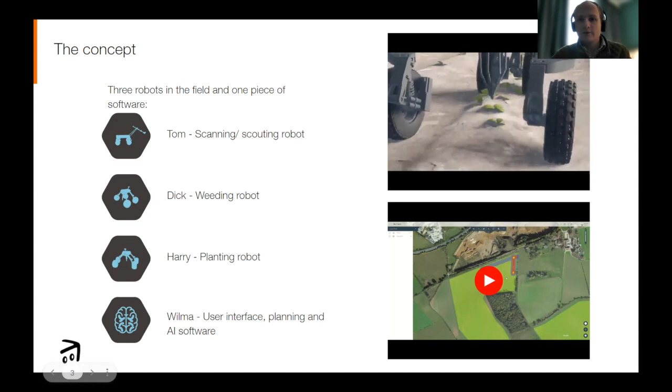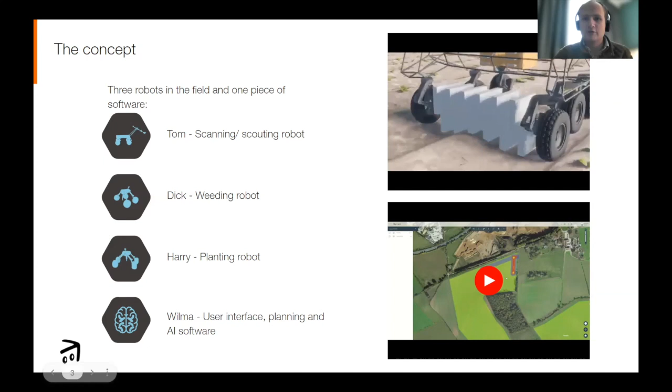I've got a couple of videos here to run through. This shows you a concept, some concept art effectively of our scanning service, and then how we can repurpose some of those components into various different formats to do the weeding aspects of the job, and then moving on to the planting aspects. I'll dive into a little bit more detail in this, but it's kind of a modular approach, and that's something that we've been developing specifically this year.

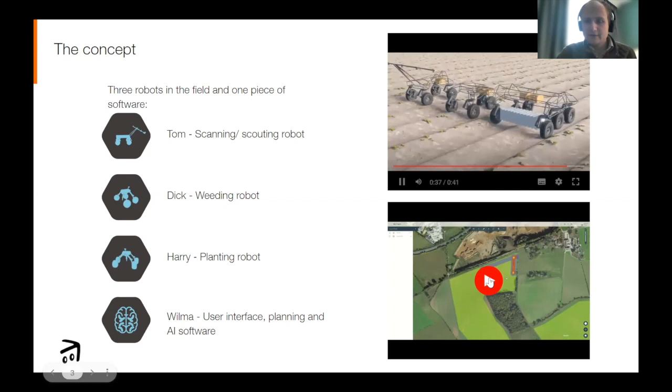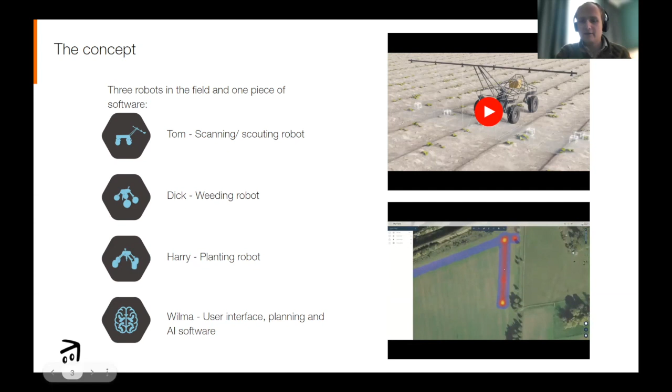The next video is just a very quick run through of the user interface of the Wilma software. It shows you zooming into a field, and then accessing the data that the Tom robot has gathered, and also not just the data, but more importantly, the insights that the Tom robot has gathered. So looking at the per plant information that we've been able to capture with the cameras mounted on the Tom robot.

So what does Tom do? I've touched on that a little bit. We've got the raw images. That information is stored on the robot. It's removed from the robot at the end of the day after a day out in the field. It's then uploaded onto Wilma, and then we get our per plant view, which is basically all that raw imagery run through a piece of AI, which identifies what's crop, what's weeds, what different types of weeds we've got there, green area index, all sorts of different insights that we can access once we've got that imagery.

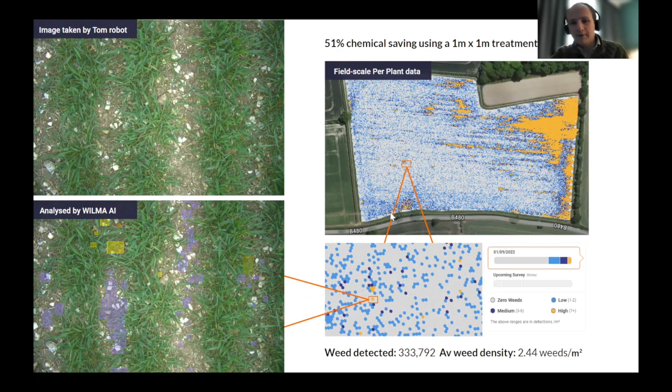This information can then be pulled through into a weed map, and we now have the capability to take that weed map and turn it into a spray map. Looking at this particular example, we can save 51% of chemicals with a 1 meter by 1 meter treatment area.

With a nozzle-controlled sprayer, we can take this map, load it onto the sprayer, and then we know the areas we need to go and spray. So we're now in a really good position where we've got the robot gathering high quality data, but we're also able to action some of our insights, and this has been one of our key developments this year.

So what I want to talk about in detail today is the Tom robot and the Tom platform.

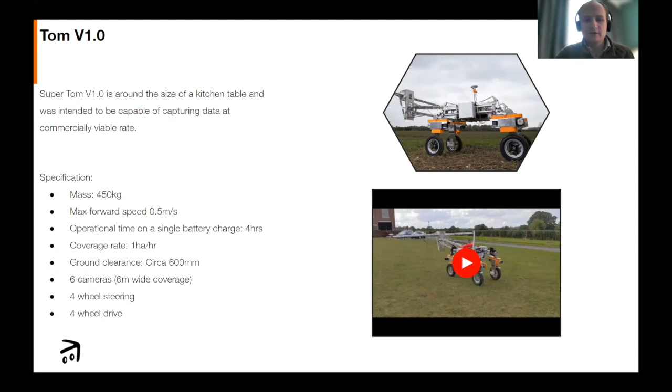We had the initial requirements and the learnings from super Tom version 1. We basically sat down as a team, discussed what went well with version 1, what went badly. We also looked at if there'd been any changes to the initial requirements we'd set out for the robot - had there been any change in coverage, the amount of coverage a robot needs to do in a day, or whether there were any other limitations that we had.

We pulled all that information together, and then we basically created models and simulations which pulled in information from testing from the initial robot, and also stated any assumptions around the models that we pulled together. Then we coupled this with validation testing. So we basically said, we're going to run some models, run some simulations, then do some testing against those models, and use that testing to validate our assumptions and our models, until we're at a point where we've got enough confidence.

We could never be fully confident, but enough confidence to allow us to move forward with the design. That then allowed us to pull out subsystem and component requirements and specifications, and then beyond that, component and subsystem design.

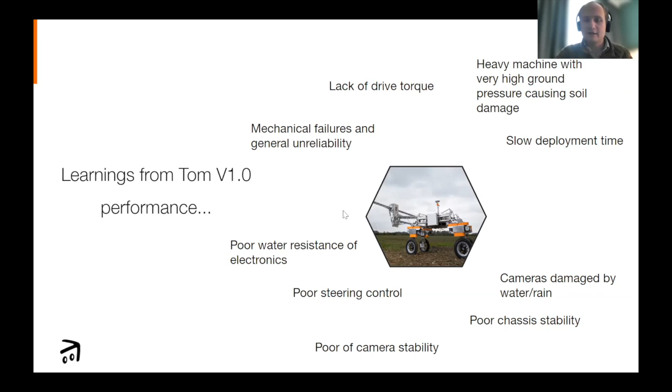A really long list, but actually an incredibly valuable list that helped us to move forward. So once we conducted the appraisal of version 1, once we built that robot and put it to the test, we then took that information and started to build our models.

We created a model around drive torque calculations and some testing. We created a spreadsheet, and we're using some understood and known models for traction, and then we took that information and applied it through to some testing. We said, right, we'll take those assumptions, create that model, test version 1, and see if the results we get from version 1 match where we are now.

And we honed in our models until we were at a point where we were able to as closely as possible match the results we found, and that allowed us to move forward based on assumptions we had for the next version of the robot, which were around the size, the mass of the vehicle, and various other characteristics we had in play.

That's where it's very key to state assumptions in the models, so that when we come back and revisit them, we know we might not always get things 100% right, but if we know what we assumed, we can always come back to that information and make adjustments, and we know the risks we're taking in developing the technology.

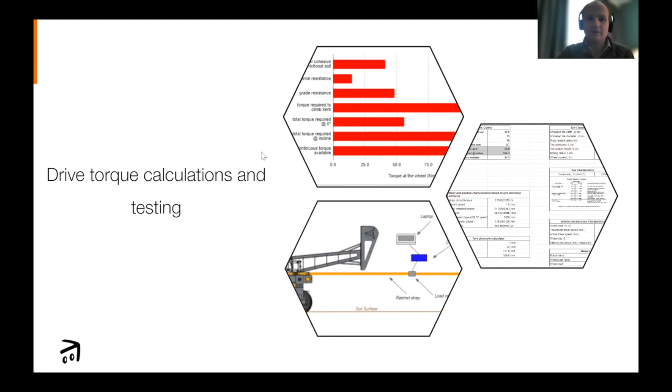Another key piece of testing we did was steering torque testing. We specified the design of our own steering actuators, as we call them, and we worked with a consultancy that helped us do that. But before we could get going, we had to really understand how much torque it was going to take to actually turn our proposed tires and wheel options in the field, through a number of assumptions.

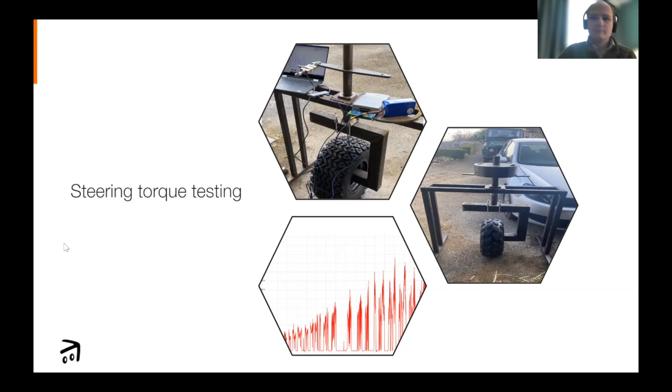We tested them on tarmac. We also tested them on a grass lawn, taking the worst case from those, and using that information to push us in the right direction when it came to peak torque requirements for our steering actuators, to make sure we didn't design a unit for our robots that was a million miles away from what we needed. So that's another very useful piece.

Contact patch and tire deflection testing. Alongside this, we used the same rig that we used for steering to determine our contact patch. We put a known load on top of the wheel, measured the deflection, and also used a tray with some soil in it to show an imprint of where the tire was and what our contact patch was, so we had a much better understanding of the ground pressure we were putting down.

We knew from version 1 that they sank in wet conditions, and that they had the potential to cause some damage, and we knew we needed to improve that. So one of our requirements had been to minimize that as far as possible. We used that to help us with the maximum mass of the vehicle, and also the tire selection we were going to make for the vehicle.

So we tied that together with our steering models to build up a really good understanding of our tires and the maximum mass of the vehicle.

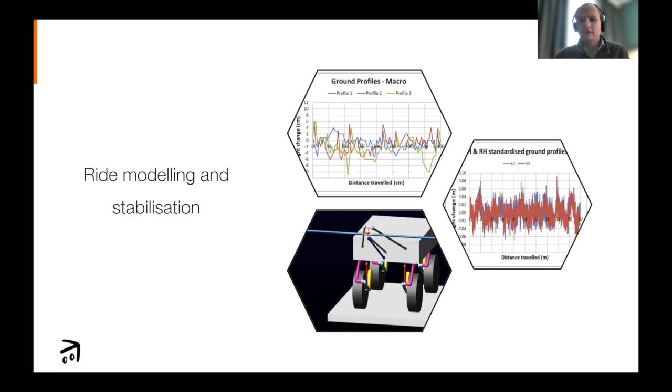And then manufacturing. We worked with a third party based just outside Newcastle for the manufacture of these robots. We commissioned them to build 2 robots to our prototype design.

Lots of lessons learned there. I think by both parties, we probably didn't have a mature enough design to deliver to them, to allow them to deliver the hardware in the way that they wanted to work.

So we ended up with our team on site there pretty much the whole time, basically supporting the build of the robots, making sure everything was moving in time, and making sure also that if there were any actual design issues or things that needed to be sorted, we had people there from our team filling the gaps on those.

Really useful experience, and we got 2 robots out at the end of it, and I think it certainly helped steer us on our manufacturing approach going forwards.

We're now much keener to do our prototype manufacturing in-house, so we have full control over the supply chain, full control over any design changes, and that allows us to make sure that the design is much more mature.

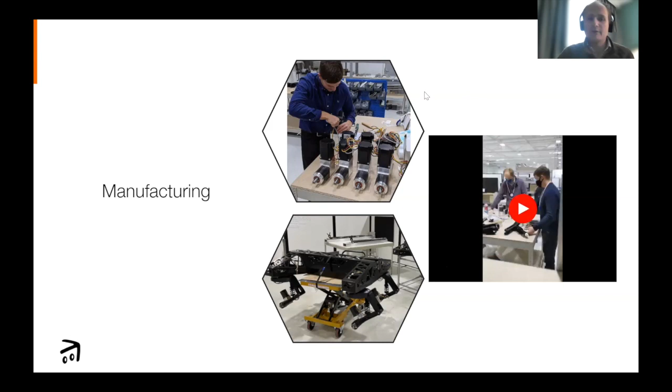So I'll go to the next slide. So what do we end up with at the end of it? So this is Tom version 3.

We ended up with 2 of these robots, and some serious improvements when we compare that to Tom version 1. We dropped the mass down from sort of 450, 500 kilos down to just over 230. Ground pressure dropped from well over 100 kilopascals down to 33, which means critically we can drive on the crop at earlier growth stages without causing any damage.

Our max forward speed was up to 1.5 meters a second, which was critical to getting our coverage rate up to roughly 20 hectares per day that we were looking for from this robot. I think we had about 3.24 hectares an hour, and 6 cameras.

We've got a ground clearance well in excess of what we had on the original robot. Still got 4-wheel steering, still got 4-wheel drive as we had before, but crucially the robot had enough torque to allow it to climb pretty much whatever we pointed at in an agricultural field.

We've been on some fairly steep slopes, and as long as we're sensible about the direction we travel, we can climb those. It will climb itself into the back of the van, and we've got much more confidence in the steering system as well, proven out now through a few design iterations.

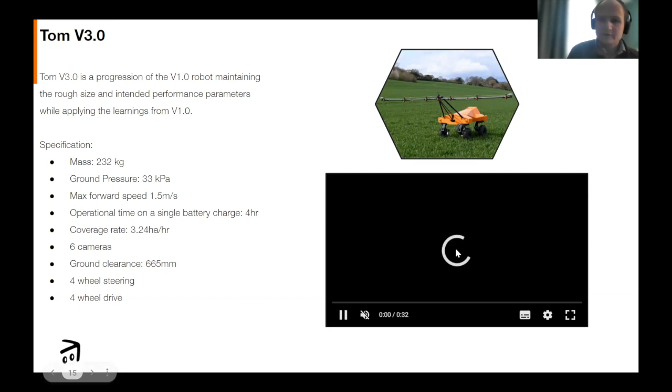I'll show you a quick video here of this - a nice promotional video we did a couple of years ago for this robot. As you can see, there is some movement in the boom, the camera boom on this robot, but it's understood and known, and it's within the parameters of the camera.

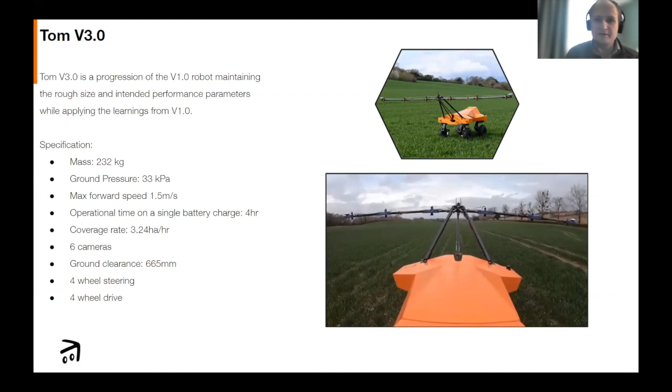There's actually a small rubber damping bush in the center of the boom, which allows it to pivot about its center. Crucially, we make sure that the mass across the boom is balanced, so it's not a jerking motion. It's much smoother, and it allows the cameras to keep up.

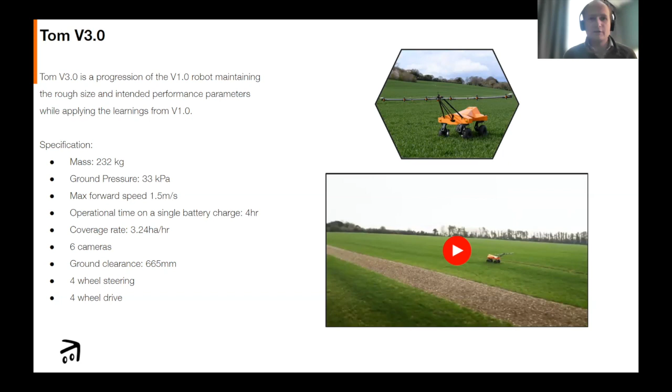Crucially, the key thing this robot had to do was gather geolocated imagery, and it allowed us to do that very well. So that's kind of shown you a little bit about the approach we took and the learnings we took from version 1 to version 3. And then I've got a little bit more.

So what's next for SRC? You could have guessed it, I suppose, but Tom version 4. This has followed a similar approach, although we've had to prove out a lot less in the way of fundamentals with this robot. So it's more about refinement.

A crucial thing we've done is the modular approach, and I think you can see in the animation there. I'll just try and move it - how do I get back? There we go, try and move this out of the way so I can show you. So with the modular approach, the robot is effectively 2 halves, which allows us to sling whatever we want into the center between the 2 halves.

We can have a scanning boom, a spraying implement or tool, a planting tool, we've looked at various other weed control methods such as electro weeding. All of that becomes possible with the same core architecture, which is really key for us. It means we can maximize the value of the platforms that we've built.

We have a number of these robots built up, and it allows us to get the absolute most out of them. When we're delivering what we do, we deliver it as a service, so we retain ownership over the hardware, and the farmer pays us for the service that the hardware delivers, and ultimately the insights. With version 4, it's the insights that come from analysing the imagery, and that's the value add for the farmer. So we can maximise the value of the hardware by making sure we can use whatever implements you want to put in the middle there. It also allows us, crucially, to change the track width of the robot.

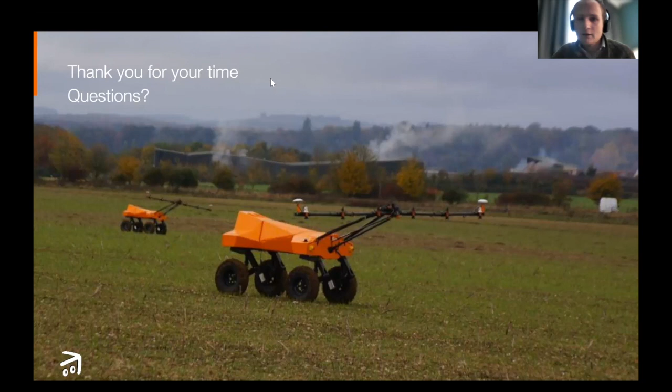Thanks very much. Okay, Robert, thank you for the talk. I'm assuming the planting is intended to be conventional, the harvesting intended to be conventional, but in terms of the Tom, is it for visualizing? So the question is, how close to commercialization is the product, and what type of plants can it be doing the visualization on? And secondly, Dick seems to be the weeder and Harry the harvester, I'm guessing - are they a year away? Are they two years away?

So in terms of the commercial aspects of the scouting service, we're doing that right now. We're out running commercial trials in farmers' fields, gathering data, analyzing it through the data pipeline, and pulling that information together for the farmers to show them what we found in their fields. We're on the path to allowing them to access that information and access actions from it.

So in terms of the scouting service, we're there. We've been operating the version 3s for quite a long time now, so we've kind of honed that in and the delivery of that service.